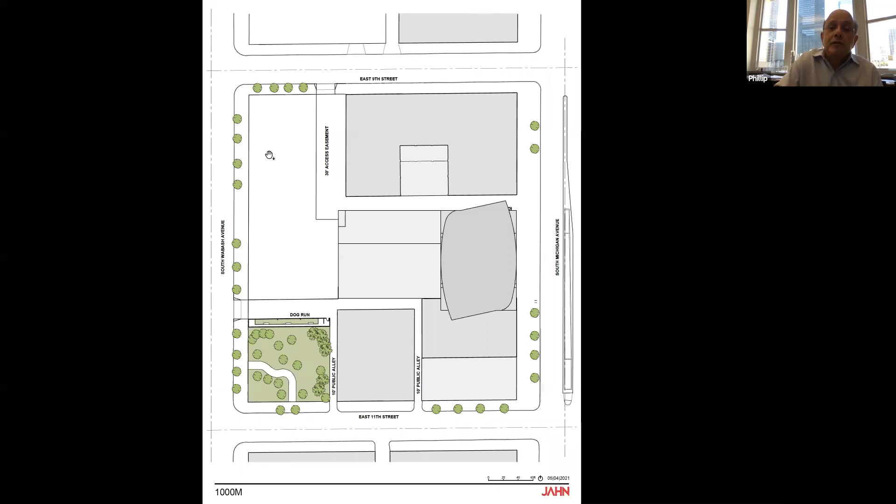Okay, this is just a site plan that shows the relationship of the tower to 910, 1006, Columbia College, and the East-West University property to the west.

An elevation. This was the elevation that was submitted as part of our planned development, maximizing the height of the building at 805 feet. And it shows its relationship to both 910, 1000, and 1006, 11th Street on your left, 9th Street on your right.

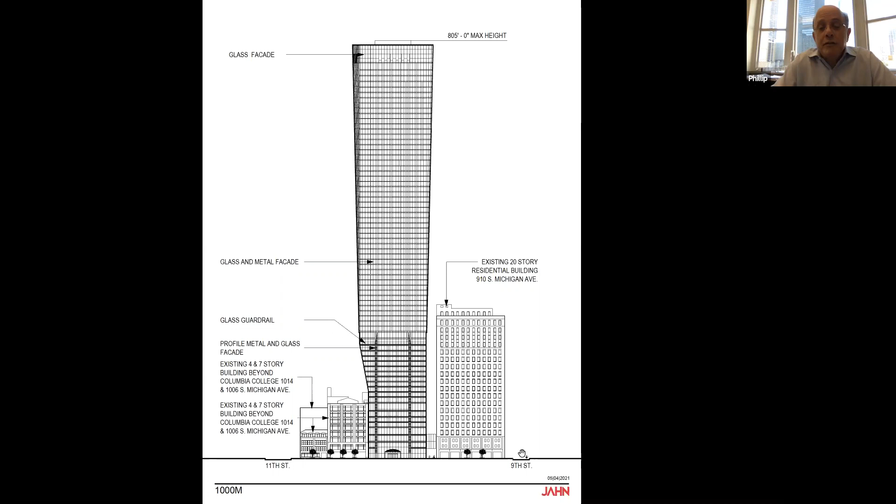This is the entire site plan of the ground floor that really kind of shows the circulation in and around the site. The Michigan Avenue ordinance prohibits us from having any drop off on Michigan Avenue or any curb cuts. So we had to come up with an alternate way to access the site. And this piece of property here is part of our assembly of sites, which consists of 1006, the site that you all see, and the small parking lot to the west, just north of this park.

So all automobile traffic comes through Wabash, through the Porte Cochere, either into or out of the garage, and then exits to 9th Street through a dedicated easement for this project. All the loading docks are located here behind the Columbia College building, and they're entered and accessed from Wabash. So the idea here is to really limit the traffic on Michigan Avenue.

Of course, people are going to say, if they're taking a taxi or an Uber, they're just going to say, oh, just leave me off here. But the idea is that they leave you off at the rear lobby, and then they exit, and that's how deliveries are handled and all those other kinds of things that make an urban building function.

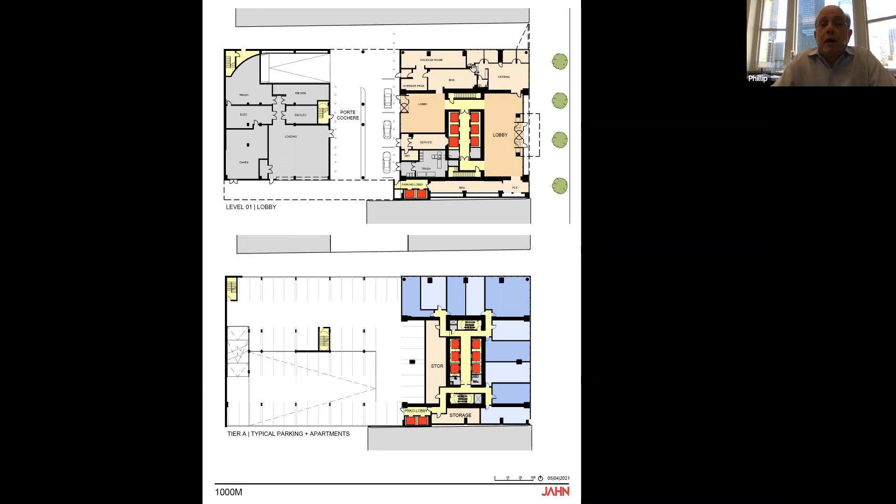And then at level 8 is the amenity deck. This portion is outdoors. There's the support spaces that are normally associated with a residential high-rise: lounges, media rooms, game rooms, an indoor pool and an outdoor pool, and an outdoor garden. Above that is a rectilinear floor plate that I had talked about earlier. They're called the Tier B apartments.

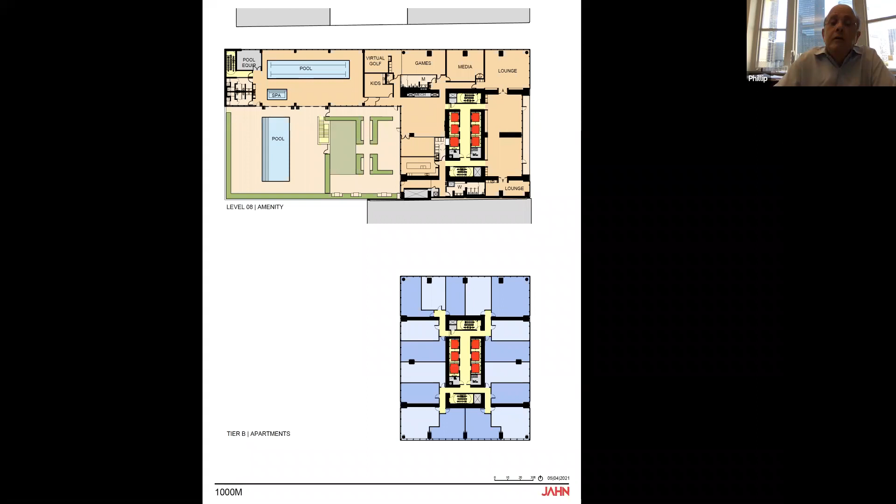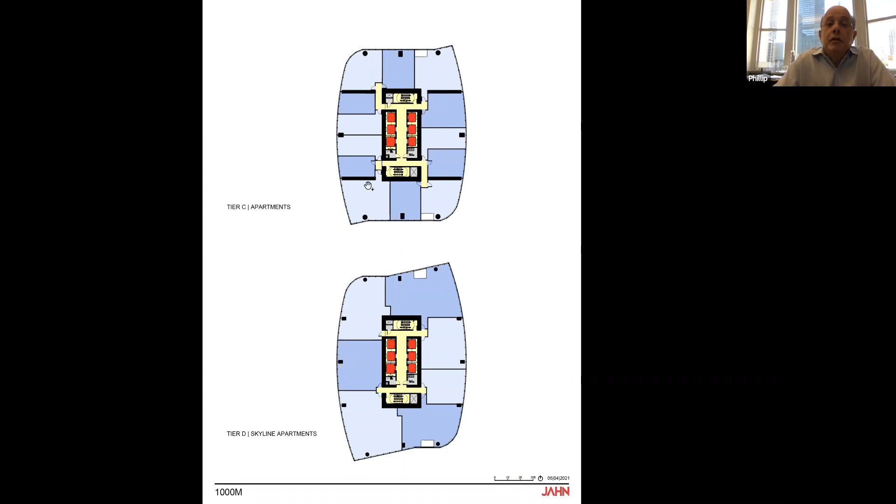And then above that are the various apartment levels. As you saw in Tier B, there are more smaller apartments lower, and as the building gets taller, the apartments get larger. Here's a section that shows the tower fronting Michigan Avenue. This is the top of the parking garage, which is the amenity deck, 91 feet above grade. And then there's 121 feet here that's the top of this wing of apartments that is part of our bonus structure for our FAR.

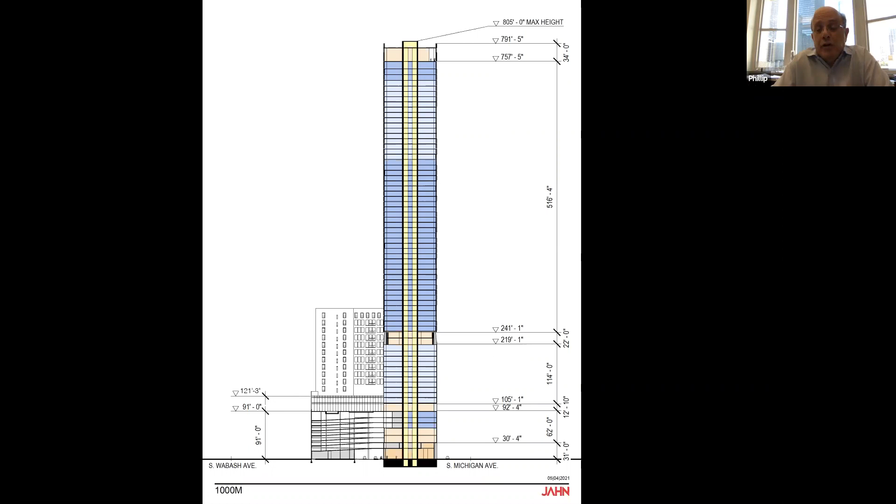This is the bulk regulation table. The upper half is what was submitted as part of our planned development amendment. That gives you the various site areas, the total square footage of the building, including 1006. So the new building is 903,455 square feet. The existing 1006 is 78,881. So the total is 982,000 square feet and change.

738 apartments, 320 parking spaces, 356 secured bicycle spaces. There are additional bike racks on Michigan Avenue as mandated by the Department of Transportation, as well as what we have in the Porte Cochere. So if somebody's riding a bicycle there and they just need to park on a temporary basis, they can do that in the Porte Cochere.

From last time, there's some comparative data because a lot of these questions came up. Before we had 506 residential units, and we've increased it to 738. The population of the building, which is determined through a program that we use to determine the number of elevators, was 1,031 people at the previous design before the project stopped. It is currently 1,085, and the reason is we have a lot more smaller units than we did last time. So the increase is fairly small.

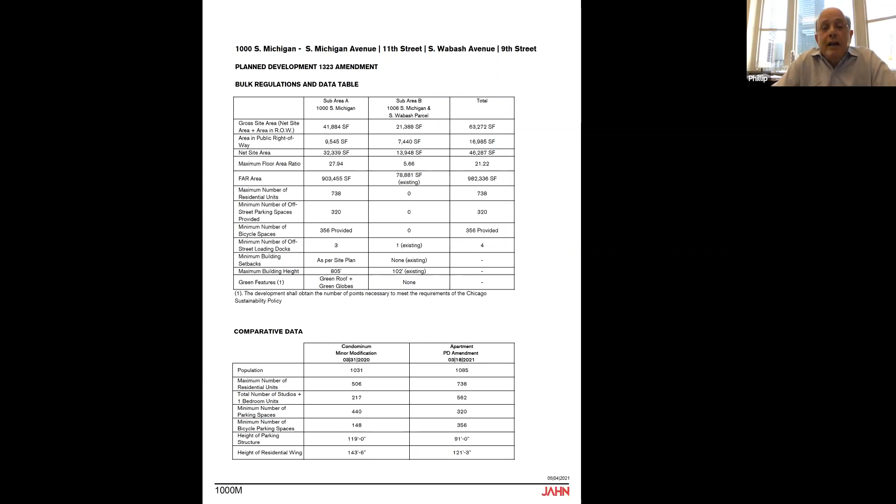143 feet 6 inches to 121 feet 3 inches. So it's a 22-foot reduction in height on the west side of the building. And I just closed with this view from Grant Park in the northeast, showing the assembly of buildings that are under construction, or the buildings that have been completed recently, and what we've planned to build now.

So I'm going to try to stop sharing and turn it back over to Jack. I'd like to ask Michael Werthmann. A little while ago, I gave him a different last name. Michael Werthmann is the man from KLOA, who's our traffic engineer, who I've worked with for a long time. We did an updated traffic study. Michael, I know that Phil talked a little bit about the entrance off of Wabash and also the exit onto 9th Street. Can you explain how the residents will use it, how any loading and unloading will occur, and how they enter and exit the site?

No problem. Can everyone hear me? Yes. My name's Michael Werthmann. I'm a principal with Kenig, Lindgren, O'Hara, Aboona, KLOA Inc. We performed the traffic study on the original development as well as the proposed changes in the development plan. As you've heard, one of the significant design elements which will help to mitigate the impact of the development is the porte cochere. This is significant in that all of the drop-off, pickup activity, access to the parking garage and access to the loading docks will all be done internal to the site, not on the external street system.

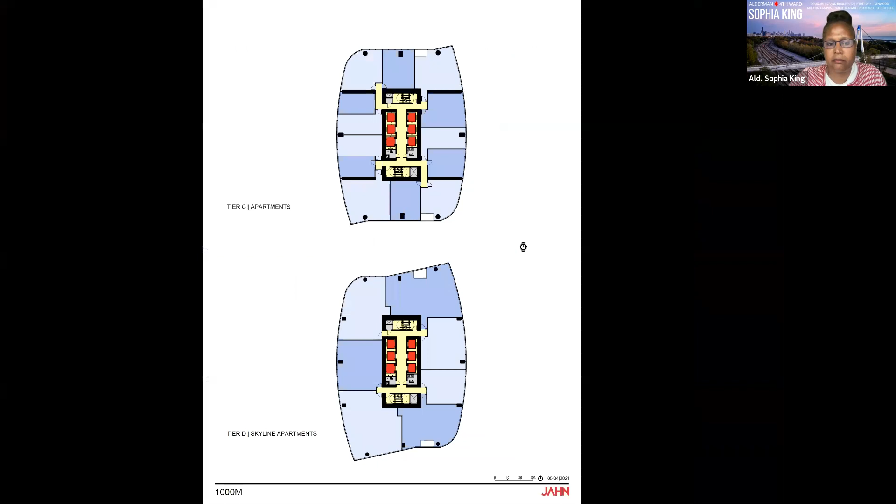And at some point, especially if there's another question about the building, can we just flip to that page in the presentation so people can really get a visual of what the questions are detailing? Phil, can you put up one of the renderings of the building? Yeah, I was referring to the screen. I think you showed it in the presentation as well. Yeah. It's being kind of hidden by the tree right there, right? Is that what you're referring to, Ms. O'Donnell? Yes, that's what I was referring to.

Yeah, my window is right there behind the tree. Yeah, the first, like right above the trunk. And it looks rather see-through right now. But is that a good rendering of it, Phil, or whoever? Phil, you're muted there. There we go. Okay, it's rendered pretty accurately. This is pretty much what you would see. It looks more like a veil. Mhm. I guess it is what it is. So thank you.

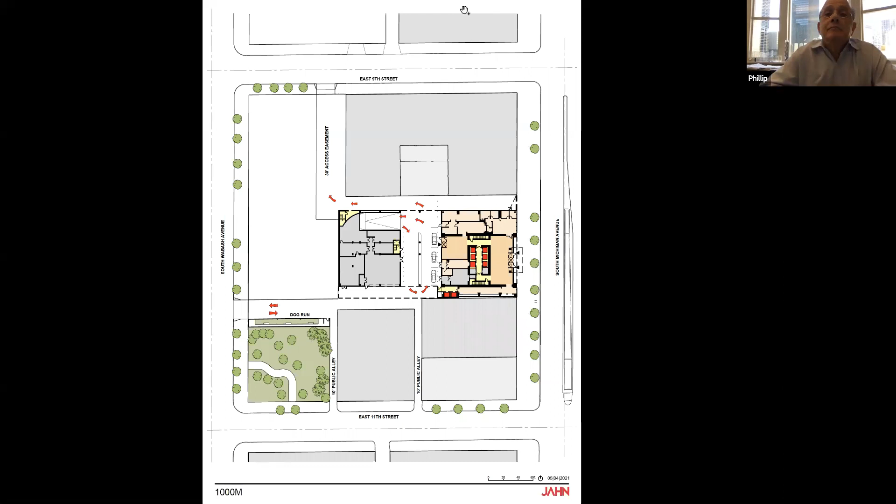What's your next question, Butler? I know you had some more. Seeing as I have you on the line right now, correct me if I'm wrong, but the height limit in the historic district along Michigan Avenue was set at like 900 feet. That's correct. They changed it when we went to the Landmarks Commission first with this and met with the city. At that time, Eleanor Gorski, who was in charge of it, agreed that they would change the height limitation from 425 to 900 feet. So our building comes in under the 900 feet, so we are in conformance with the regulations of the city.

My next quick question is, because this is going from condo to all rental, how does that affect the amount of money and tax revenue the building generates? Does that increase it, or is it nominal? I can answer that if anyone wants me to. Who are you? Sure, I'm Rob. I'm with the development team.

The way it works out is that the taxes on condos are about double what it is for rental buildings. Our tax studies show that this building as a rental will be paying around 5 million to 5.5 million per year. And if I remember correctly, under the condo scheme, it was closer to 10 million. So again, that's nothing we have control over, but that's just what the tax system does in Chicago.

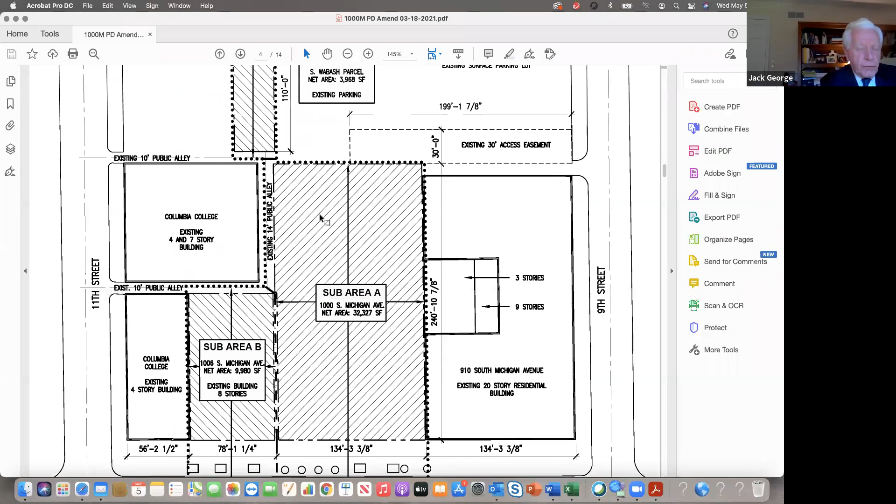Well, I can check on that for you, but I can tell you that they previously approved an 830-foot building at this site, and I believe, and I'll have to check, Dennis, I thought that they also changed the limit to 900 feet for this corridor right in here. I'll verify that and I'll get you that information. But I think that's correct. What I said is correct.

But I will. You're not distinguishing between the Landmarks Commission and the Plan Commission. So Landmarks approved a 900-foot building, calling this a transition zone. But Plan Commission has never amended the Near South Community Plan, and City Code says PDs have to comply with adopted plans. Well, I'll have to get you an answer on that, but I can tell you that when the Landmarks Commission changed it, they did so with the understanding that this historic district would no longer be bound by a 425-foot limitation on buildings in this corridor. And so that's why they changed it.

Now, the plan that you're referring to, I don't have it in front of me, so I can't read the wording of that plan. But there are other buildings all along in this whole area that have exceeded 425 feet in the last few years. So I'm not sure of what you're referring to, but I will look into it. But I do know what happened with our building, and I do know what happened with Landmarks, and I do know what happened with their change in the heights of buildings in the historic district.

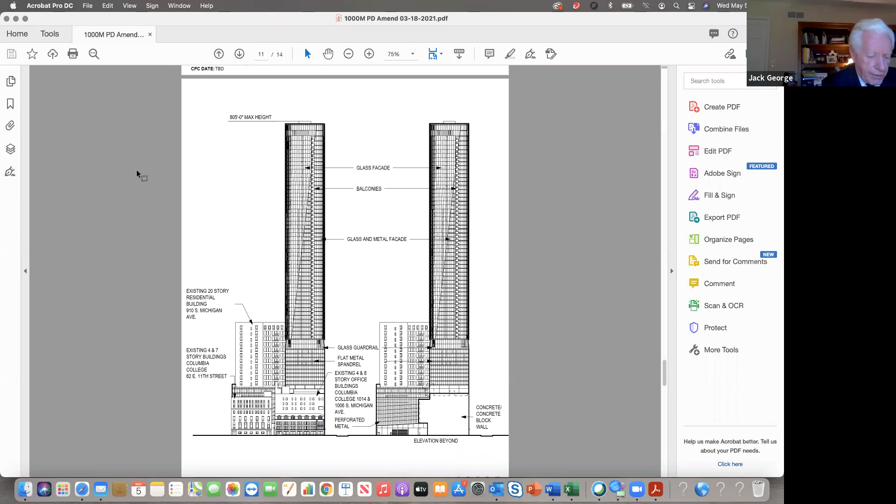When you look at the code, it spells out when you're required to do an amendment to a planned development, and there's 4 different categories that require it. If there's a change in the character of the development, if there's an increase in the number of dwelling units, if there's an increase in the FAR, any of those trigger an amendment, and we fall within that category, and that's what the amendment is about. No other reason.

All right, we have the south elevation, if I may. On the left part of it, this is the elevation from 11th Street. So this is that small 8-story building, right where my cursor is, the 1006 building. This is the 10-foot alley in between. And to the left is the Columbia College building. So you see beyond, 1 story poking up is this residential wing that extends over. And then there's 910 here. The tower is not behind the Columbia College building.

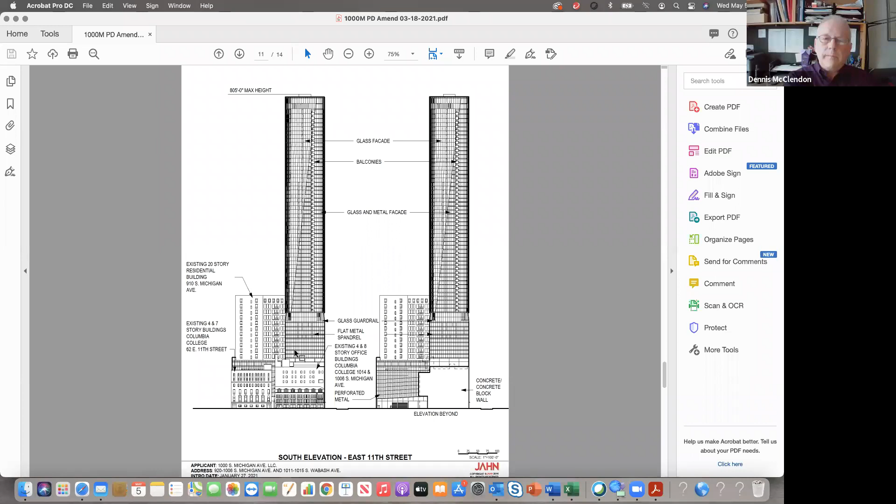All right. So no part of the parking garage will be exposed above and behind the Columbia Theater building? It's behind the Columbia Theater building. It's 14 feet away, which is the width of the alley. On the ground floor, it's almost 25 feet away. But the garage itself does not extend above the Columbia Theater building.

All right. Any other questions, Dennis, or we can come back? Who's next, Prentice? Stephen Gablenick. Okay. Hello, Mr.

Gablenick. Hello, good evening. Can you speak to the disruption that is going to occur during the construction phase? Can you tell us how many days a week, what hours of the day we can expect to have noise and other kinds of disruptions to the immediate community?

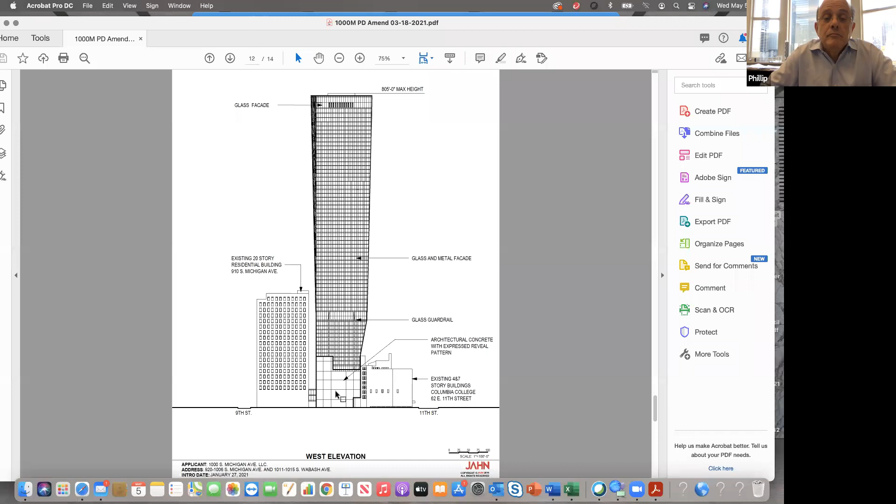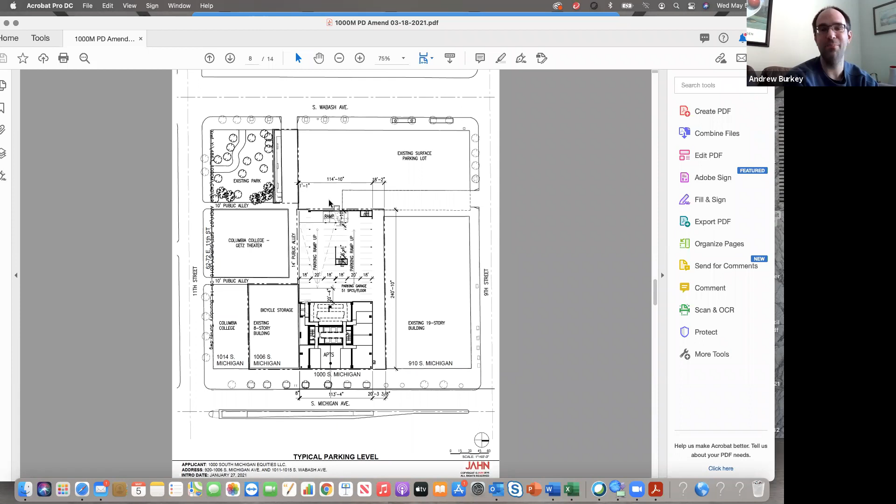And I guess the second point to my question, and I saw it in the chat, is I've experienced construction along Wabash closing the bike lanes for months on end. So I'd like to put a shout out that the bike lane be kept open and not combined with the general traffic during the construction period.

We'll do our best, Andrew, to give consideration to that. As you can see, we definitely gave consideration to cyclists because of the number of bike spaces we have in our building. And that's a big thing in this part of the city. So we intend to do it. And they'll do their best to make sure that those bike lanes are not closed and remain open.

There may be some times, but whatever has to be done, we'll do it with the understanding that we will take into consideration the cyclists in the area, because that's a concern not only to us, but to the entire city and to the city government, keeping those open. I appreciate that. I'm sure there'll be future cyclists in your building as well. Right. Oh, yeah. Thanks.

Okay. Mr. Greenthal, Mr. Adams, I see your hands up again, but we're going to let people who haven't gone yet. And then we're also going to try and finish up in around 5 minutes or so.

So, Mr. Greenthal. Yeah, my question has to do with short-term rentals, whether it be Airbnb or through a hospitality firm like Sonder. And my question is, will they be allowed? And if not, how will we be ensured that that policy won't change in the future, such as if you're finding a low occupancy rate?